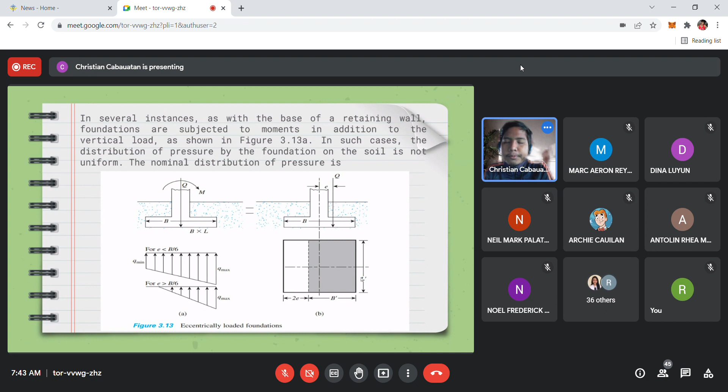Later on we will see in the solving how to understand well the pressure diagram. So this would be the equations that we will be using later on.

For Q maximum, it is equal to the vertical load divided by the width times the length of our foundation, or the area of our foundation, plus 6 times the moment applied or used in the foundation, divided by b squared times the length. That would be for the Q maximum.

And for the Q minimum, the only difference from the Q maximum is the sign convention. It will just be negative instead of positive.

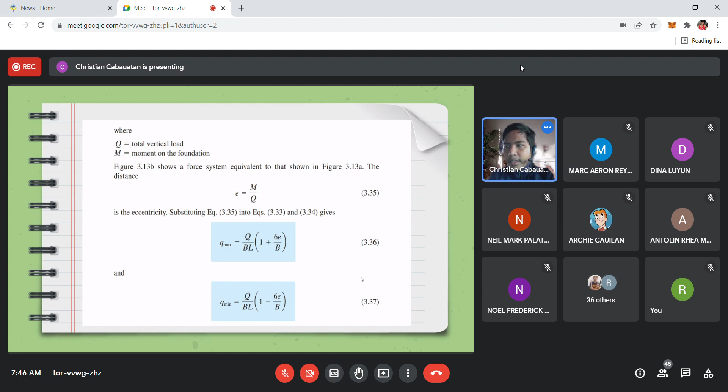So this is the concept for that. Now there are 3 cases for calculating maximum and minimum pressure cases, according to the values of its eccentricity and the width of the footing divided by 6. This would be to maintain the minimum pressure that is always greater than or equal to 0.

For case 1, if the eccentricity is less than B over 6 - meaning the distance of the eccentricity is smaller than the width of the footing divided by 6, or 1/6 of the width of the footing - the Q maximum that we will be using is Q over B times L, times 1 plus 6e over B.

And for its Q minimum, instead of the plus sign, it would be a minus sign. So when the eccentricity is less than 1/6 of its width, the value of Q minimum will be positive for compression. The Q minimum should be positive, for example, when it is in compression.

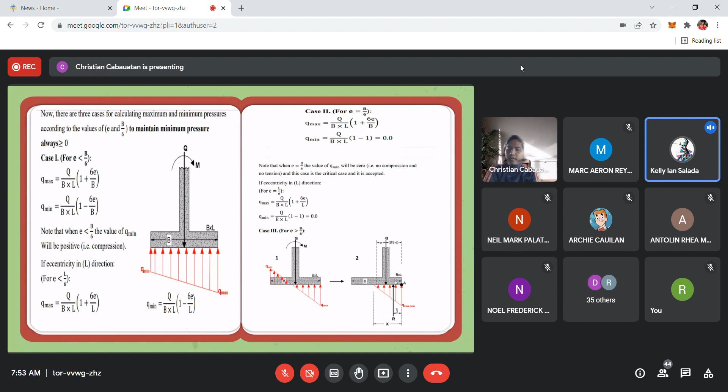Okay, let's move on.

Okay lang, okay lang. So the value of Q minimum there is negative, okay, because it is tension in the soil. But we can know that soil cannot resist any tension.

So before, in our mechanics, we consider tension as positive, and compression as negative. But what do you call this... for the reaction of the soil, sabi nga niya the soil cannot resist any tension. Therefore, ang gagawin natin sa sign convention ni tension ay magiging negative.

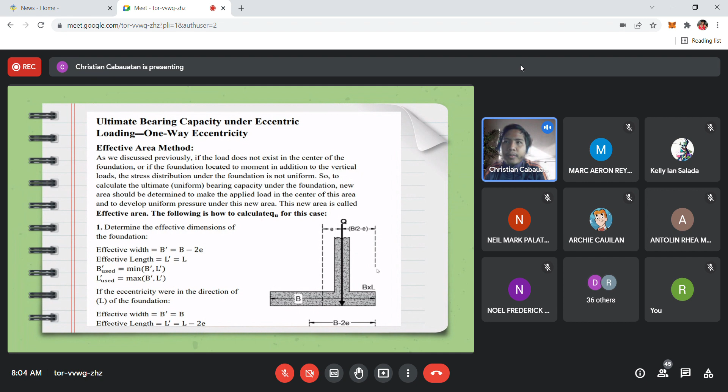Okay, yan po. The second one, we will be using the Terzaghi equation. For example, for square footing, it is 1.3 C NC plus Q NQ plus 0.4 gamma B N gamma. For strip footing, it is equal to C NC plus Q NQ plus 0.5 gamma B N gamma. And for circular footing, it would be 1.3 C NC plus Q NQ plus 0.3 gamma B N gamma.

So the value of B there, sa last term before the gamma there, magiging B prime. And then the B there, it would be the B prime na gagamitin natin na sinolve natin, not the original B.

If the axis is on the B direction. But if the axis is on the L direction, so si L ang ating gamitin. So other factors in the equation will not change - the NQ, the N gamma, NC, the bearing capacity factors - hindi na yan mapapalitan.

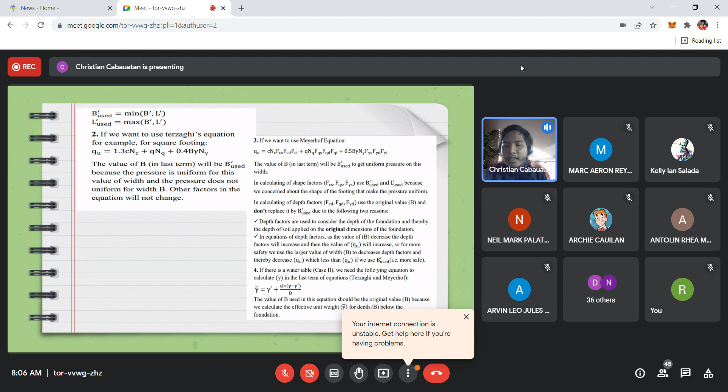And then the fourth one, if there is a water table, just like in the case 2 before, sa ating modification of water table, we need the following equation to calculate the gamma by using the gamma bar, wherein gamma bar is equal to the gamma prime plus d times gamma minus gamma prime over B.

For safety consideration, or by using the factor of safety, the factor of safety is equal to Q ultimate divided by Q allowable, wherein it should be greater than or equal to 3. If the maximum load, or the Q max, is less than or equal to Q allowable, it is equal to QU over the factor of safety.

For the factor of safety against Q maximum, the factor of safety is equal to QU, the stress, divided by the Q maximum, it should be greater than or equal to 3.

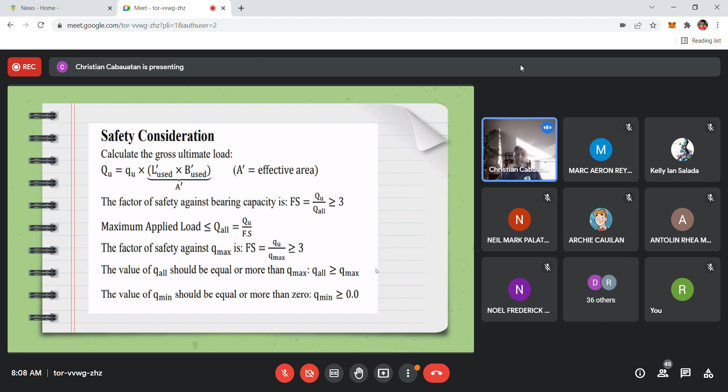If the value of Q allowable is equal or more than the Q max, ano ang gagamitin natin? Tignan natin later on dyan. And if the value of Q min should be equal or more than 0, ano yung ating gagawin? Tignan natin later on during our computation.

Do you have any questions with our discussion before we will go to example number 1? May question po ba? Hello? May question po ba? None, sir. Okay.

For the first problem, if the soil is given below, determine the allowable bearing capacity of an isolated rectangular footing 2 meters by 2.3 meters that's subjected to a vertical load of 425, and the applied moment is 85 kilonewton meter, by using the factor of safety equal to 3.

Okay, so the internal friction there is 20 degrees, the cohesion is 35 kilonewton per square meter, and the gamma dry or the unit weight dry of the soil is 16 kilonewton per meter cube. And then the depth of our footing is 1.5 from the natural grade line.

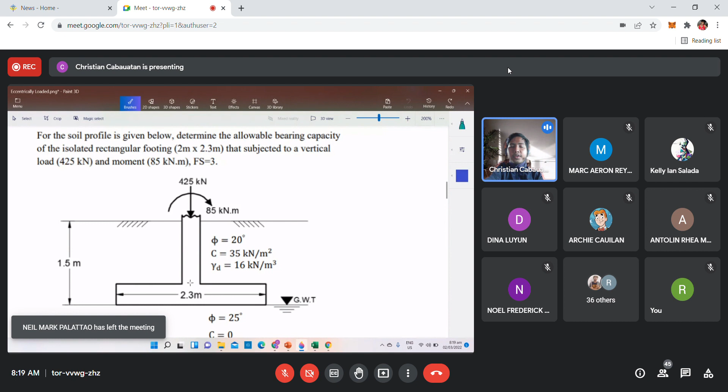So kapag hindi naman po na sinabi sa problem, and you can see in the figure, the dimension for the length of the footing is 2.3. Therefore, it is clearly stated that ang ating gagamitin, or the eccentricity, is in the axis of the L direction.

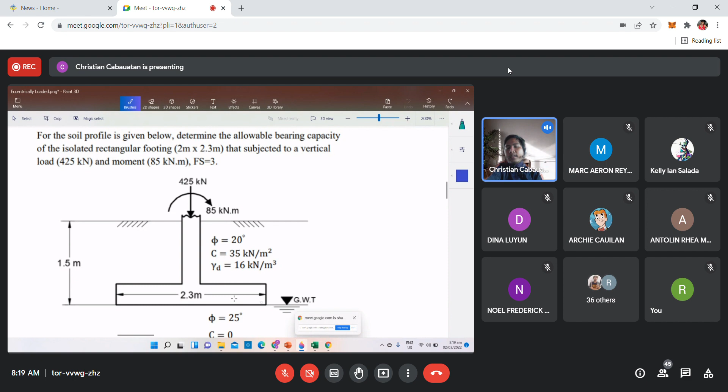Therefore, ang kanyang B, if the eccentricity is in the axis of the length direction, ang kanyang B prime, it would be the same, kasi hindi naman doon umikot si eccentricity, there is no effect. But yung kanyang L, it would not be the original length, which is 2.3. Mababawasan na siya ni 2 times the eccentricity. Therefore, si L prime na yun, which is 1.9.

Therefore, in getting the effective area of the foundation, we will be using the new dimensions of the foundation, which is 2 times 1.9, to get the 3.8 square meter.

So, yung kanyang eccentricity nga po ay 0.2. The gamma that we will be using, the unit weight, which is equal to the gamma prime, wherein gamma prime is equal to the saturated unit weight of the soil minus the unit weight of the water, which is 9.81. Therefore, 19 minus 9.81, ang ating gamma prime, it is 9.19 kilonewton per cubic meter.

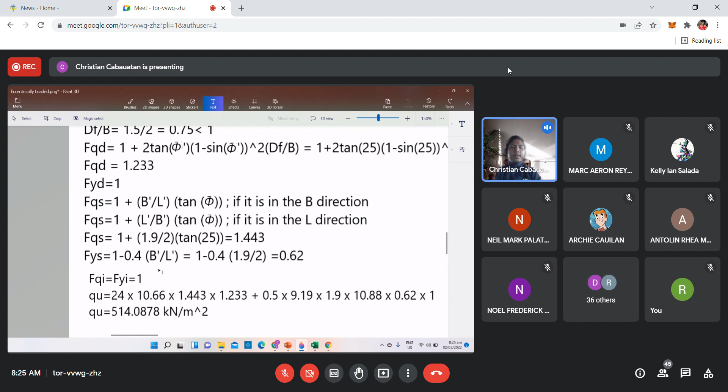So by using the formula of Meyerhof, then we will just input all the given datas, or the solved datas, and then we can get QU. It is equal to 514.0878 kilonewton per meter square.

And then Q allowable is equal to QU divided by 3. So the QU there, 514.0878 divided by 3, we can get 171.3626 kilonewton per square meter.

And then Q max, we will determine the Q max. It is equal to Q divided by B times L, times 1 plus 6E over L. The eccentricity is equal to 0.2. The L over 6 is equal to 0.3833. Therefore, eccentricity is less than the dimension of L over 6.

Ang ating Q max ay 425, the Q applied load divided by 2, times 2.3.

Okay, the original. And then 1 plus 6 times the eccentricity, 0.2, divided by L, because the eccentricity is in the axis of the L direction. By solving Q max, we can get 140.17 kilonewton per square meter, wherein it is less than the 171, or the Q allowable. Therefore, we will consider the safety of our foundation, so we will be using the Q allowable, which is equal to 171.

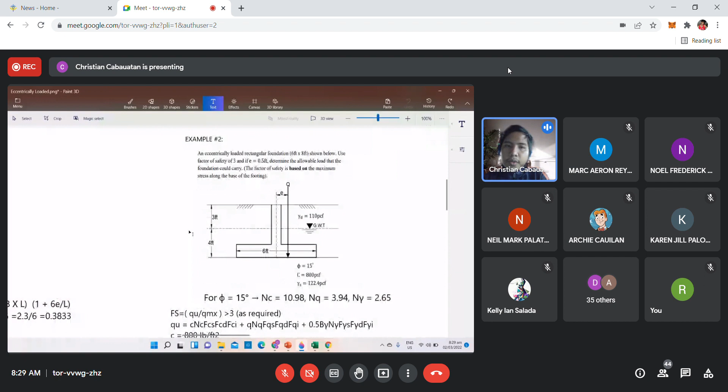Okay, I hope wala kayong maintindihan, kasi kapag may face-to-face na tayo, I will be giving your second quiz, and sana may isulat naman kayo sa quiz ninyo. So I will be leaving you the second problem, and I will discuss this one tomorrow before we start the next topic. I'll discuss this first because it is an example ng may eccentricity. Given na yung kanyang eccentricity, and then the factor of safety is based on the maximum value, which is, I think, greater than or equal to 3.

And then yung kanyang groundwater table, it is on top of our footing. So basahin niyo na muna, and then I will be posting our topic for tomorrow, ipopost ko na po siya ngayon for you to have an advanced reading. Yun lamang din kasi I will be going to school. Yun yung mahirap, kailangan once na mag-start ang face-to-face, kasi I think we will only be allowed to enter during our laboratory time. If we see our schedule, for example 7:30 to 9 is our lecture, and then 9 to 10:30 would be the laboratory, so it's hard to shift. Mag-shift ka kaagad kung mag-LMS ka during the first hour, 7:30 to 9, and then papasok ka ng 9 to 10:30, so I don't know kung paano ko gagawin yun.

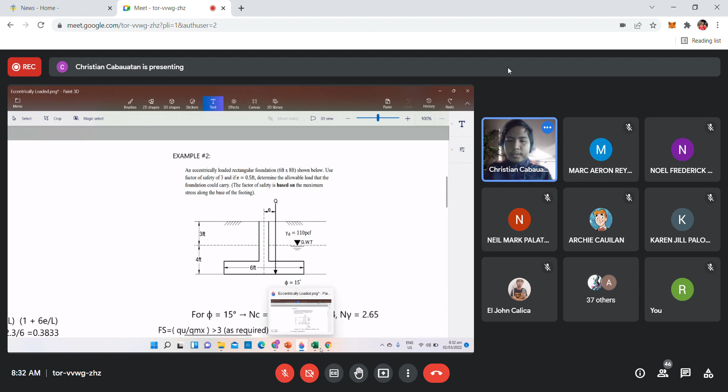Okay, yun lamang. If you do not have other questions, wala na po ba talagang question, before we will be leaving? Tapos mo pala yung solution, sir? Yung solution po, sir, tapos na po. Yes, actually this topic and the solution for this one, posted na po siya sa ating LMS. Ipopost ko na lamang po yung additional topic for tomorrow. Hindi po, sir, okay, thank you. May katanungan pa po ba? Do you have any questions? Wala naman na.